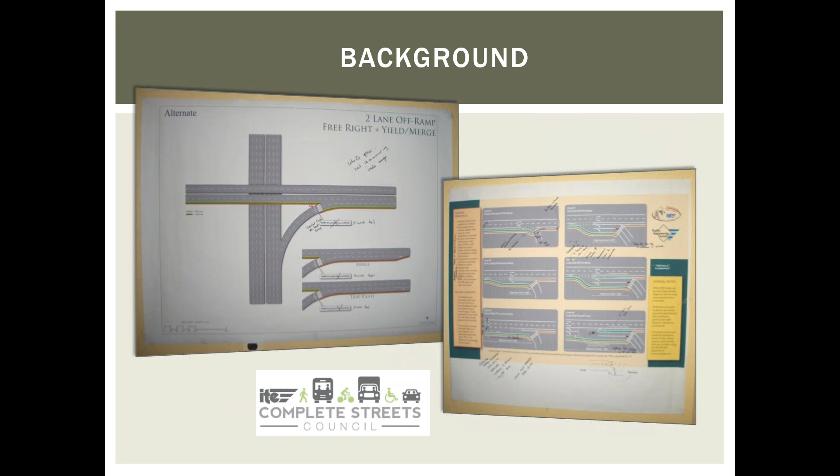So where does the freeway end? You're going to hear me talk about speed, perception, and expectation a lot, and freeways fall into that category quite a bit, because they're the opportunity to either continue the message of being on a freeway onto the local street, or tell someone on a local street they're already on the freeway by the way we design them, or to do the opposite: make a very clear statement that you've left the freeway and now you're in a community where people of all modes and all types of users should be present.

Motorists should be looking out for them. A lot of this has to do with slowing it down and making it very obvious in terms of the expectations for all modes, making it welcoming for people of all modes to be navigating through these locations.

This often is the critical component of a community in terms of being able to have real mobility, and have walking and biking be an alternative mode. And of course there are people for whom this is their primary mode, either by choice or necessity, and having freeways bisect areas where we have desire lines, land uses, and reasons people are going and want to walk and bike there is important.

However, of course, that has to be balanced with the mobility needs of vehicles at interchanges, and I think that's what makes these types of trade-offs and design decisions particularly challenging, because there's a lot of demand and need for freeways to work, for freeway interchanges to work for a lot of different users.

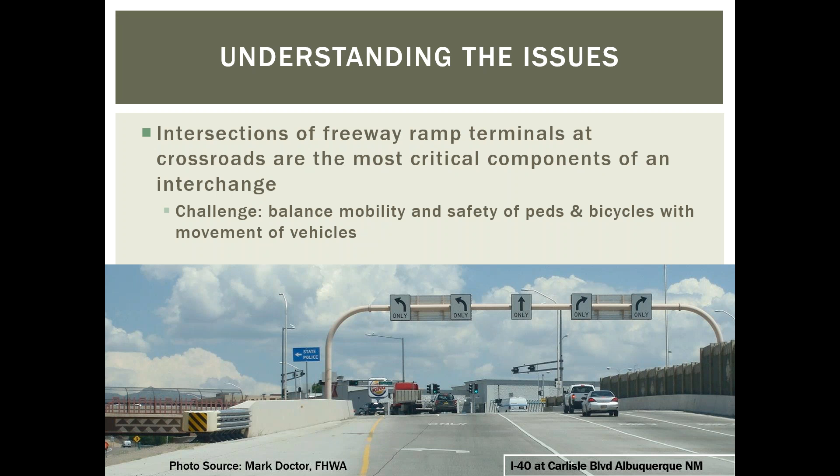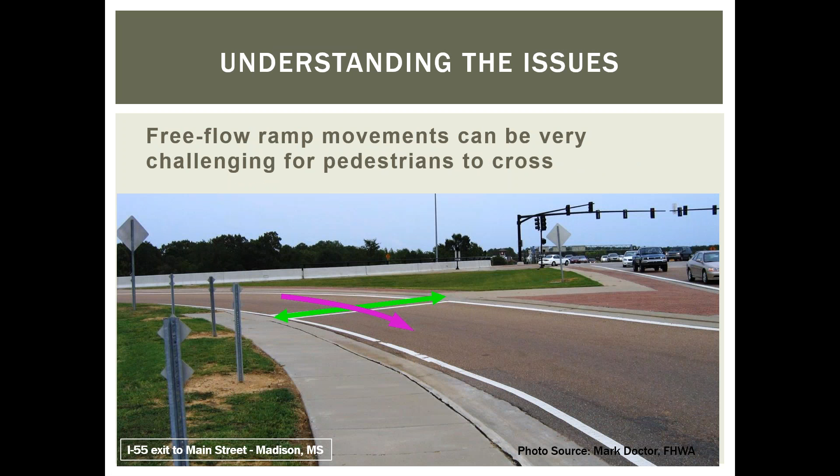In particular, when we talk about speeds, it's the geometry of the ramps that drives a lot of the speed. Anytime we have free flow conditions, which often we do in both the on and off ramp portions of an interchange, we have challenging, often uncontrolled interactions happening between vehicles and pedestrians, and vehicles and bicyclists, at high speeds.

So key issues involve expectations. If there are not very many pedestrians, and often there are not many bicyclists in these areas, either because they don't feel comfortable or there are not that many reasons land use-wise they need to be there, it keeps expectations even that much lower that you're going to be interacting with those types of users. Speeds really do create an opportunity for, when collisions happen, for much more intense injuries and fatalities to occur.

We have discontinuous facilities. I talk about one of the signs that we should put in the MUTCD is the good luck sign, because we could put that at a lot of our interchanges right now, right? You see that a bike path or a bike lane comes right up to the start of it, and then it just disappears and picks up on the other side. And we see that with sidewalks either not being present at all on structures or maybe only on one side.

Lighting is a major consideration, especially underneath an overcrossing where you have all kinds of difficult hidden areas where pedestrians might be waiting to cross the street. Unmarked crossings, again, kind of just this general expectation that there wouldn't be pedestrians and bicyclists at these locations, so why provide for them? And so there just are not facilities at all in many cases.

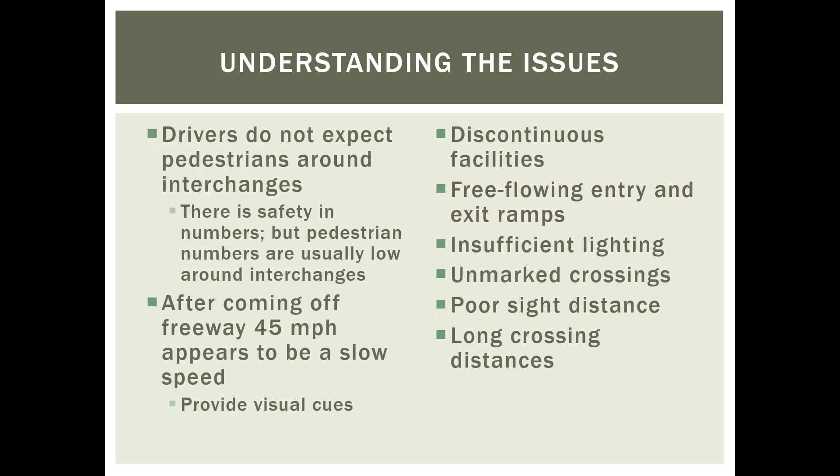Definitely poor sight distance, both just because of the angle that we're designing the ramps, as well as some of the obstructions that might be in place, and for sure long crossing distance, especially if we have really sweeping ramps that create a large radius, or if we have really large signalized intersections that have multiple lanes that people have to cross.

So there are some resources that are available out there. The most recent on this is the draft recommended practice that ITE has released. It's available in the bookstore, and I've finished all of the response to comments on the final round of edits, so I'm expecting that the final proposed recommended practice should be out pretty imminently.

That is the most recent, and it did refer back to some of the other state and local efforts to put together some documented design guidance on this topic. But there is nothing at the AASHTO level, at the Federal Highway level, in terms of 'this is what you shall do' to accommodate pedestrians and bicyclists.

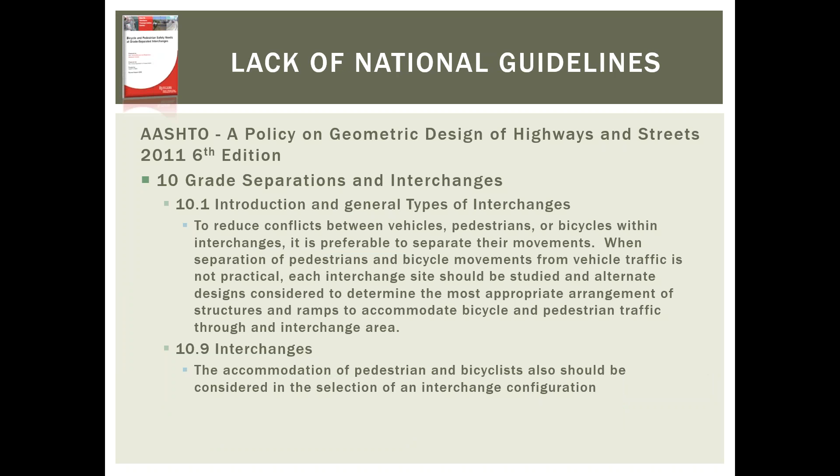So I'll be talking about some specific case studies and some specific configurations of on and off ramps in the next several slides, but I think it's really important to start with what we call the guiding principles in the ITE recommended practice. And I think that's really helpful because there are so many different types of interchanges that we were not able to go into all of the different iterations of in the recommended practice, that the application of these guiding principles to those, as well as to large intersections, can kind of help extrapolate from this document into other types of scenarios that you may find yourself in.

So first and foremost, providing those ped and bike facilities. I've been mentioning that in terms of if there's an expectation that why would someone want to be walking or biking here - maybe that's the only way they have to get somewhere, maybe it's because they are choosing to do that, and in many cases it's because we've actually provided land uses, we've provided bus stops that they need to be there, and this is their way to be able to have mobility.

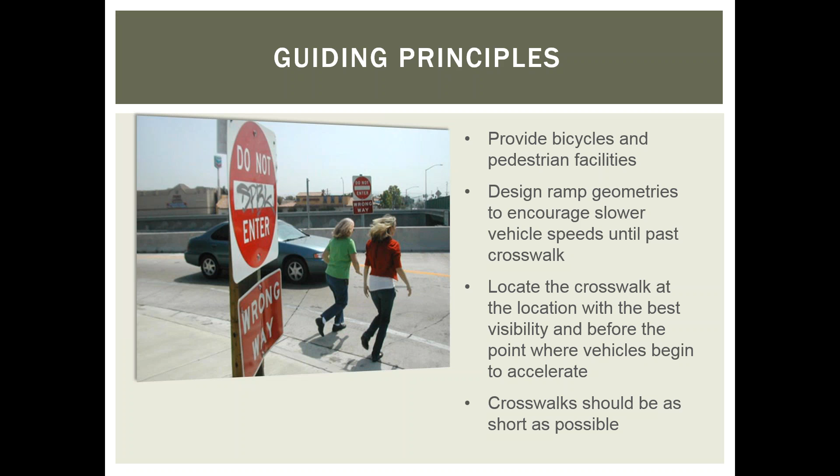So provide those facilities, slow things down. That's going to be the most common kind of recommendation you'll see in a lot of these iterations - how can we change the ramp geometries to have slower speeds occurring where those conflicts between pedestrians, bicyclists, and motorists occur. Locate the crosswalk at the split-the-difference location, and I'll show you examples of that - so not the most direct, not the shortest, but halfway in between where it's the most visible and the slowest speed.

Some specifics on bicyclists, and these will be more obvious when I show you some pictures and graphics. We often have very long dedicated on-ramp lanes on the arterial before you get onto the freeway.

When those on-ramp lanes, whether one or two dedicated lanes, are 200 feet or longer, we have a different recommendation for where you place the bicyclists. Rather than keeping them to the left, you keep them to the right and then move them to the left. There's what we call a merge zone put in place during that transition from right to left.

Also selecting crosswalk treatment is important. A lot of the crosswalks in an interchange configuration are uncontrolled, with no stop sign and no traffic signal. So using best practices from other contexts, for when we need to do more than just paint two white lines on the street, improves pedestrian safety and is applicable in an interchange context as well.

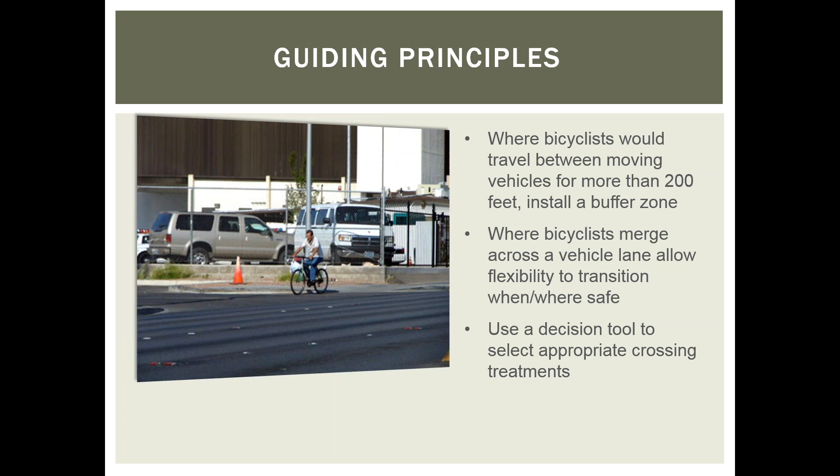So just do it. Don't fail to provide, but provide the right level of accommodation needed for the context you're in. A lot of this is cumulative, so for those who have taken Designing for Pedestrian Safety 101 and the other 201 modules, you'll see bits and pieces of crosswalk, sidewalk, and intersection design best practices that roll up into this interchange module.

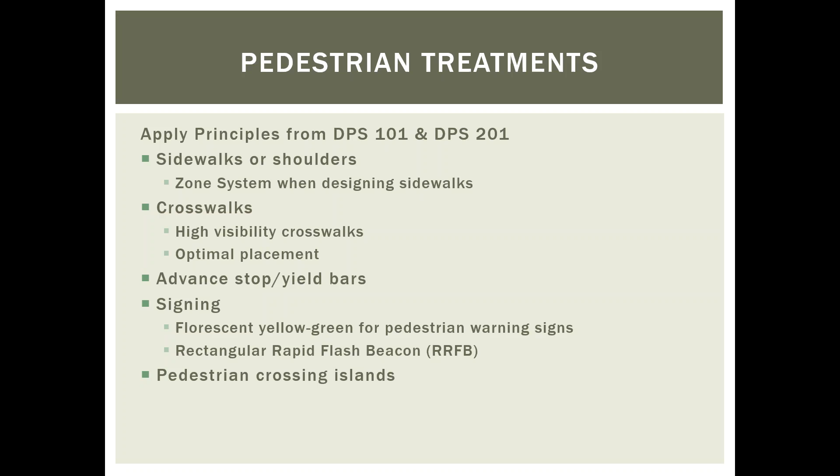Providing a buffer for pedestrians is one of the most important things we can do to improve comfort and reduce stress as they walk through a complex location such as an interchange. Providing a dedicated, buffered space along the arterial is a very important best practice, and it also helps with ADA provision of ramps at the intersections.

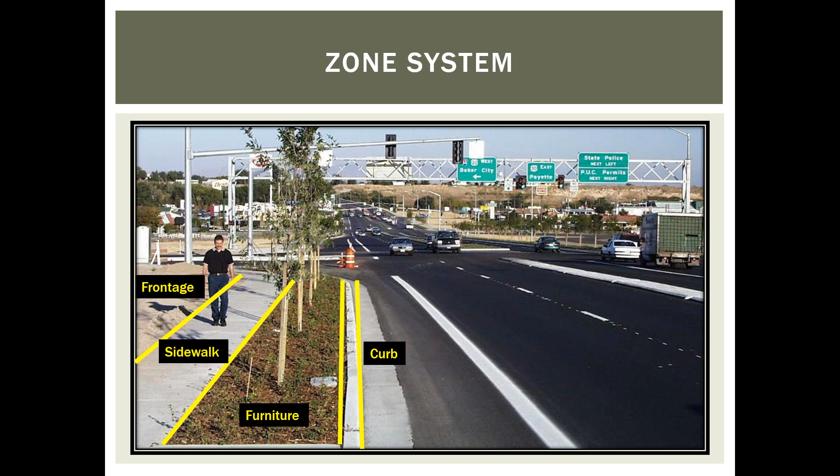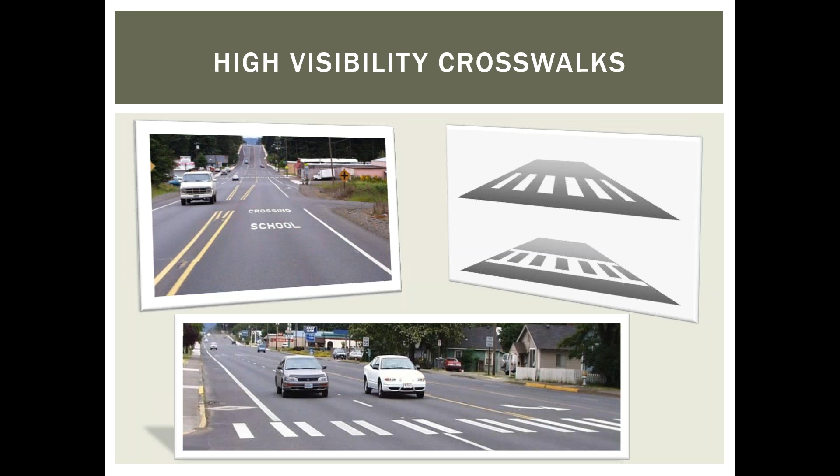Providing high visibility crosswalks as a baseline, particularly for uncontrolled crossings, makes pedestrian crossings very visible to motorists. Providing signing to make sure crosswalks are visible in advance is important, but not over-signing—over-signing is usually a sign that the design itself isn't working well at an interchange.

The benefit of raised islands and medians applies to interchanges too, breaking up the crossings, letting you pay attention to one direction at a time, and signaling that you're now in a local area rather than on the freeway—also an opportunity for placemaking and streetscape.

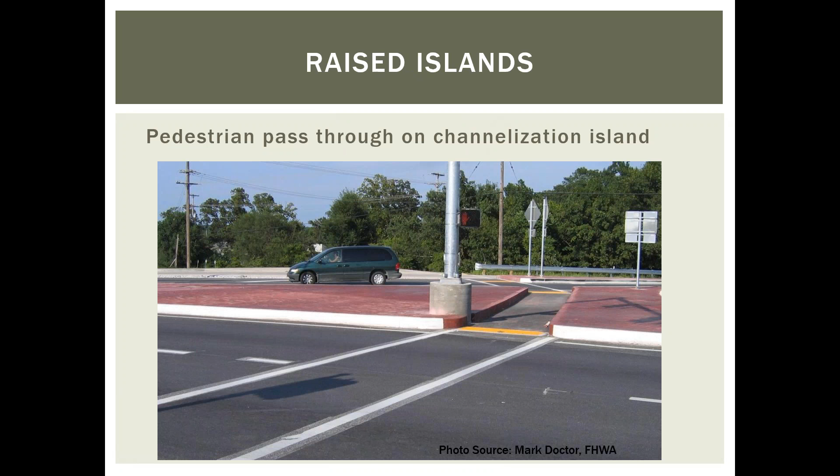Enhancing beyond just signing and striping for uncontrolled pedestrian crossings is really important at many on and off ramps with high speeds. Testing for rectangular rapid flashing beacons, pedestrian hybrid beacons, and pedestrian signals helps improve yield compliance for crosswalks—but again, not over-signing or cluttering it so it's difficult to navigate for all users.

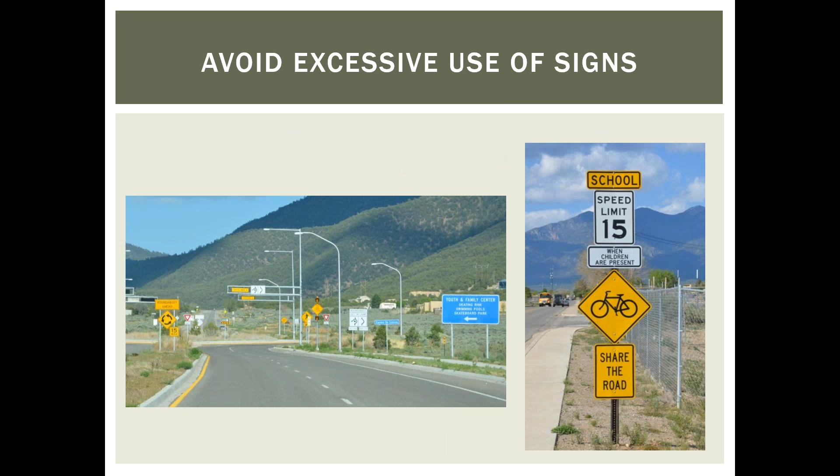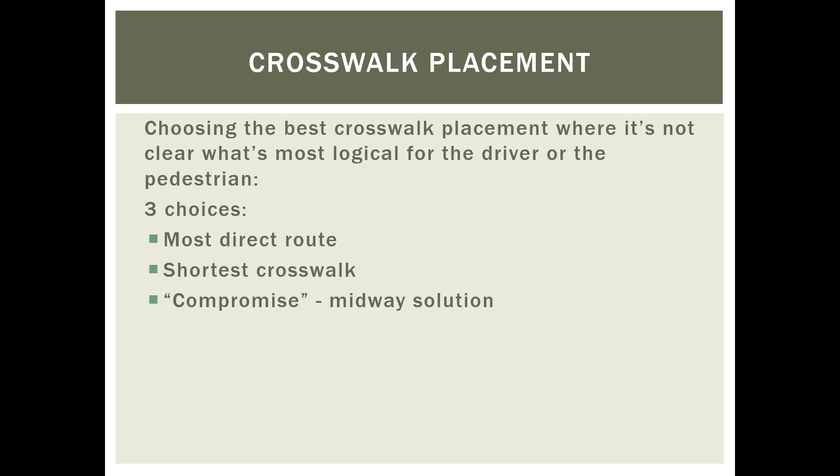Let's talk about crosswalk placement. I mentioned that splitting the difference is the approach we recommend. You have three choices when placing a crosswalk across a ramp. You can place it at the most direct route, extending the sidewalk directly to the other edge. The challenge is it's the longest distance, giving the most exposure time, and pedestrians are crossing with their back to traffic.

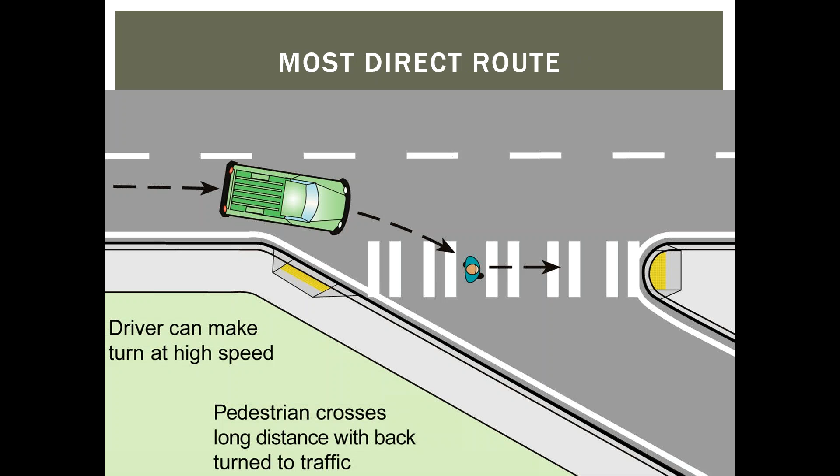You can place it where it's shortest distance-wise, but this crosswalk is much less visible to the turning vehicle heading to the freeway, and it's where the driver has already accelerated through the turn. So splitting the difference is the location that isn't too far out of the pedestrian's way, but is highly visible, and the motorist's acceleration hasn't yet begun.

I'm going to walk through a series of iterations that go from the least complex to the most complex on the on-ramp and off-ramp side. I'll touch on some of the more innovative interchange configurations out there, but mostly refer back to the guiding principles, since the ITE recommended practice includes the single point urban interchange, the SPUI, as a case study, but doesn't touch on the others specifically.

Starting with the most basic and least complex of the interchange configurations: this is an on-ramp where we have a shared right turn to get onto the freeway. I'll pull up some bubbles so we can see some of the key features, and you'll notice these accumulate.

We'll talk about the first set of these, and then as I add a different layer of complexity to the ramp configurations, we'll add new tools to the mix. You can see we've tried to square off this on-ramp as much as possible to make it as close to turning right as we can, while still accommodating the typical design vehicles—trucks in this situation.

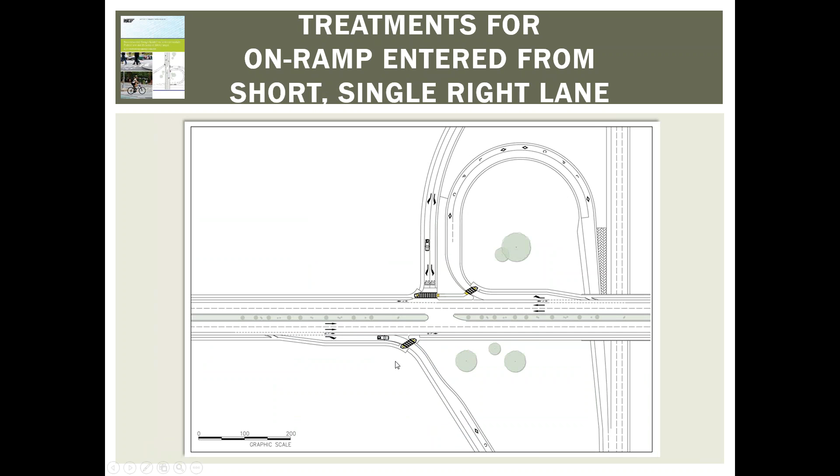So now we're at the next iteration, where we have a dedicated right turn lane, but it's less than 200 feet, so we're calling this a short right turn lane. This is a configuration you should be used to at a conventional intersection, where best practice is to keep the bike lane to the left of the right turn to avoid a right hook, so you don't have the right turning vehicle crossing across the bike lane.

But what's different in this configuration is we still have a single lane dedicated right turn lane into the freeway, but now it's longer than 200 feet.

The 200 feet was a guideline that we crowdsourced through all the different conferences and sessions we took this to over the years. That number came out of the mix of how long somebody's going to feel comfortable riding as a bicyclist with vehicle travel happening both to the left and to the right of them. So for about 200 feet, that's uncomfortable but manageable, but longer than that, it starts to get very stressful.

So the concept here is that because this is longer than 200 feet, you're keeping them to the right, and then when you get about 200 feet out, you're merging them across to be to the left before the on-ramp diverges from the arterial.

Again, this is an excellent location for using green striping. A typical way to do it would be to green stripe it here and then do full lane bars all the way through this conflict zone, and then green lanes when you move it to the left, so it becomes very clear where that weaving action is happening, where that conflict zone is.

The point here is that you're able to get across in an area rather than at a single point, so the bicyclist can really look for the most comfortable place to make their way across. That's trying to reflect what we heard from a lot of people about what they're doing in practice, in terms of where they feel most comfortable, rather than being told right here, right now you need to cross what could be a pretty busy stream of traffic.

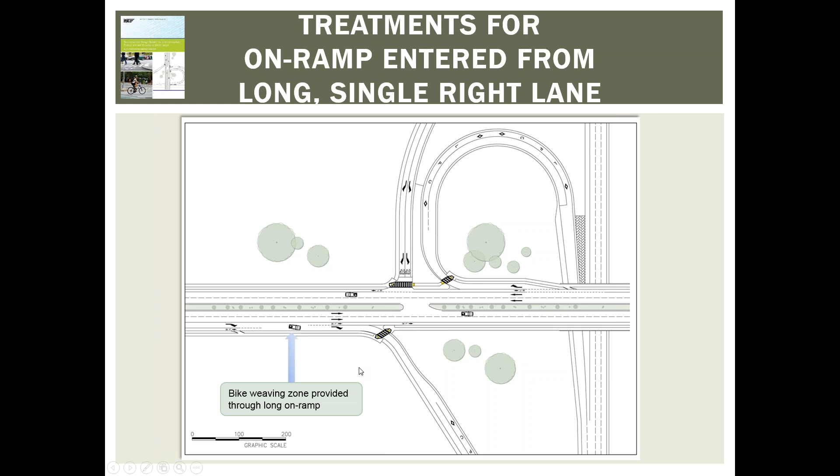This is the next level of complication. In all of these configurations, we still are providing the crosswalk, but I think many people may choose to take the crosswalk approach because you still have this weave zone happening, but now you're weaving across 2 lanes of traffic.

There's an argument about whether you should even provide this at all, but what we've tried to do is, in all cases, have an opportunity for people to stay on the street when they want to. Using green paint here to emphasize the conflict zone would also be helpful.

This is likely one of those cases where you would use some type of beacon, if not a pedestrian hybrid beacon, on the crosswalk. If that ends up being the implemented device for the crosswalk, that's certainly going to benefit the bicyclist, who can exit and use a trail and then cross using a pedestrian hybrid beacon.

What you see shown here uses California yield laws, in states where this is a stop for pedestrians this would, of course, be an advanced stop bar. But if this does remain an uncontrolled crossing, the very important additional treatment is putting these advanced yield limit lines to reduce the multiple threat that happens when you have the two lanes here.

You also see that we've tightened this up quite a bit, so that the turning speeds happening at this location should be quite a bit slower than they conventionally would be.

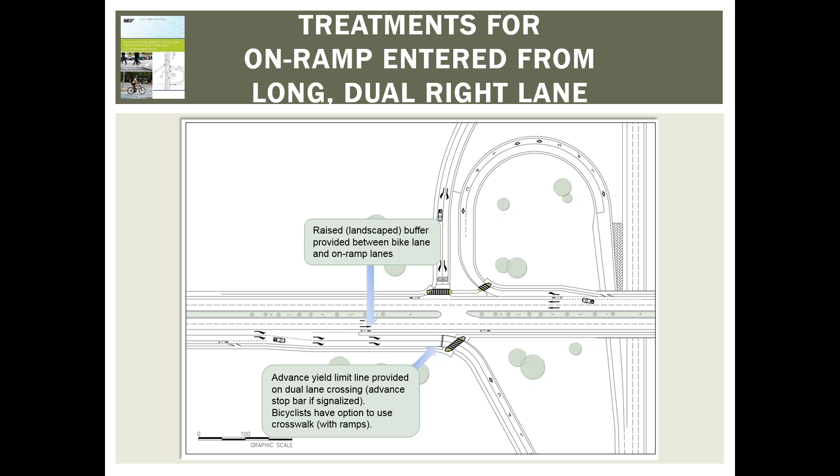I'm also recommending putting in a raised landscape buffer at this location. You now have a situation where a bicyclist is traveling with 2 lanes of travel on either side of him or her, so having a raised landscape buffer can help it feel like they're not only protected by paint.

Here's just a photo simulation example of how that 2-lane treatment could be enhanced. You see the advanced yield limit lines coming in here, as well as the installation of a rectangular rapid flashing beacon on the crosswalk.

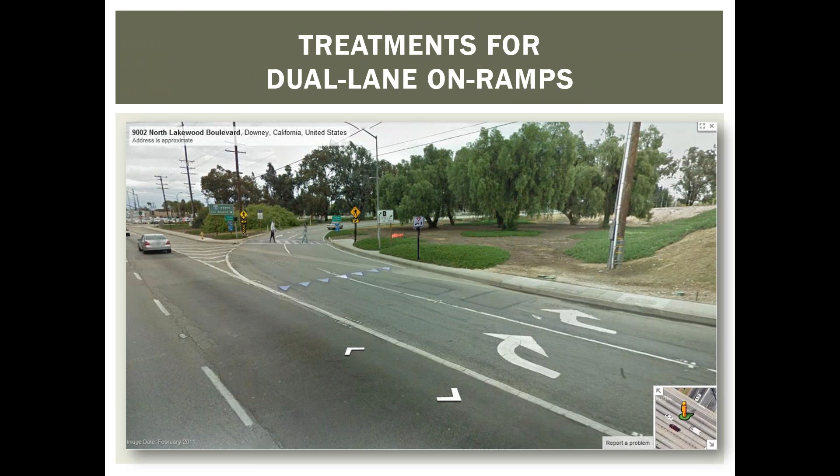So this is the example I was mentioning earlier in terms of providing that HOV queue jump option. What's happening here is you've got a dedicated on-ramp lane leaving the arterial, but then you have this second option lane for people in HOVs to have access. Here you don't even have the crosswalk striped, but often you see a scenario where you do have the crosswalk striped, and you're setting up a multiple threat that's avoidable by just starting the HOV downstream of that crosswalk. You're also creating a situation for bicyclists where they don't know where to position themselves because of that option lane, and the chances that a vehicle might suddenly cut them off as they're trying to travel through. So why you don't see that as one of the cases is because it's just not recommended.

In the ITE guidelines, the recommendation is to pick one. If you need two lanes, then do two lanes. Otherwise, just keep it at one and start that queue jump downstream.

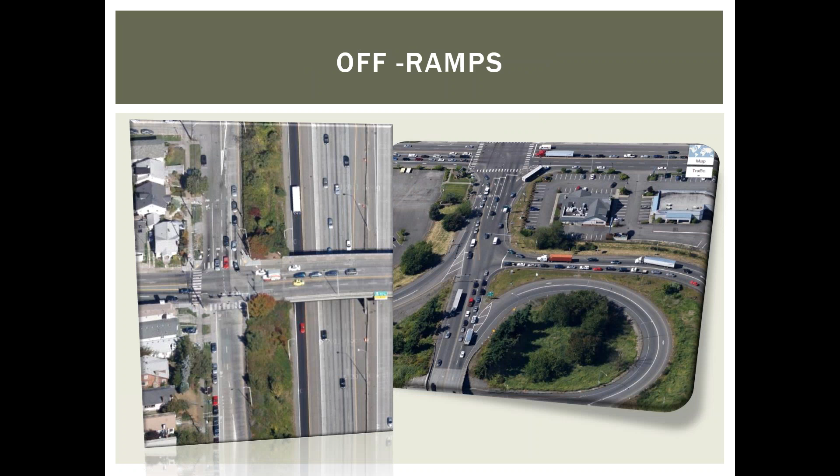Moving on to a similar progression on the off-ramp side, this is a scenario where we have no dedicated receiving lane on the arterial. It's split, so you have an eastbound and a westbound off-ramp scenario - one coming in here and the other being the loop coming in over here. The key feature is that it's stop controlled rather than yield controlled. You're coming in at the T, stopping, and then turning right, rather than what we see quite frequently, which is just a very sweeping right turn with yield control.

This is a similar scenario, except now instead of an eastbound and westbound split, we've got both ramps coming in for both directions. Again, stop controlled - you stop and then turn left, or stop and turn right, slowing things down and making it possible for the crosswalk to be very visible.

Now we have a scenario where there's a dedicated receiving lane on the arterial. We've tried to adjust the geometry so it's as slow of a right turn movement as possible, given that you still have that dedicated receiving lane. But what you'll see now is one of the controversial aspects of ITE, so I want to spend some time explaining the reasoning for why we have this configuration in the manual.

What's happening here is you have the bike lane on the arterial approaching the ramp with a yield control. The reason for the yield control is not because we think, from a right-of-way allocation standpoint, that the bike should have to yield to the vehicles - of course vehicles on the arterial don't have to yield to vehicles exiting the freeway. This is a scenario where it's physics: we've determined it's not possible for a vehicle exiting the freeway onto the arterial to have enough time to see a bicyclist traveling through and be able to slow to yield to them. So it's an assignment of right-of-way based on physics, not based on modal priority.

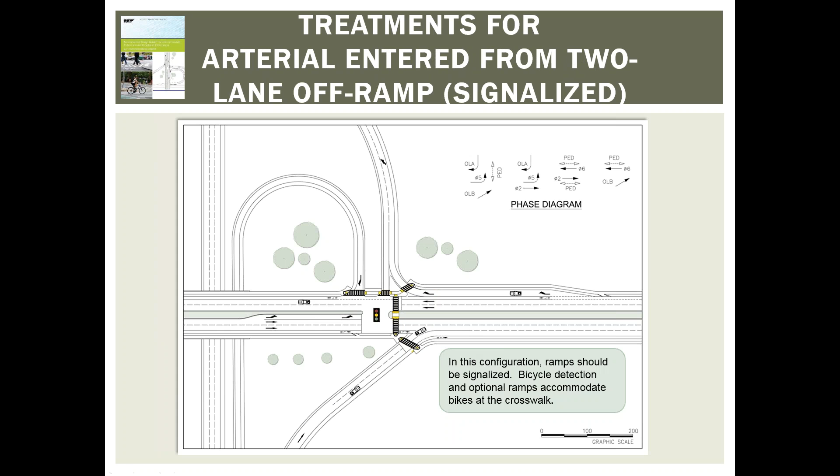Finally, we have the configuration with two exiting lanes and two dedicated receiving lanes. This is very similar to the one-lane, one-dedicated-receiving-lane scenario, except we now have a multiple threat on the crosswalk crossing those two lanes on the off-ramp. So again, at a minimum, putting in that advanced yield limit line to address the multiple threat is critical. This is also likely a scenario where a pedestrian hybrid beacon could be considered for the pedestrian and bicycle enhancement of that crosswalk.

So how do you choose if this is a rectangular rapid flashing beacon, a ped hybrid beacon or HAWK, or a full pedestrian signal? There are different tools out there. This is one I've helped develop called the Crosswalk Plus tool, and it goes through the different contextual considerations of all the devices that have been studied, referring back to the NCHRP 562 study from several years back on the efficacy of different devices given different contextual considerations.

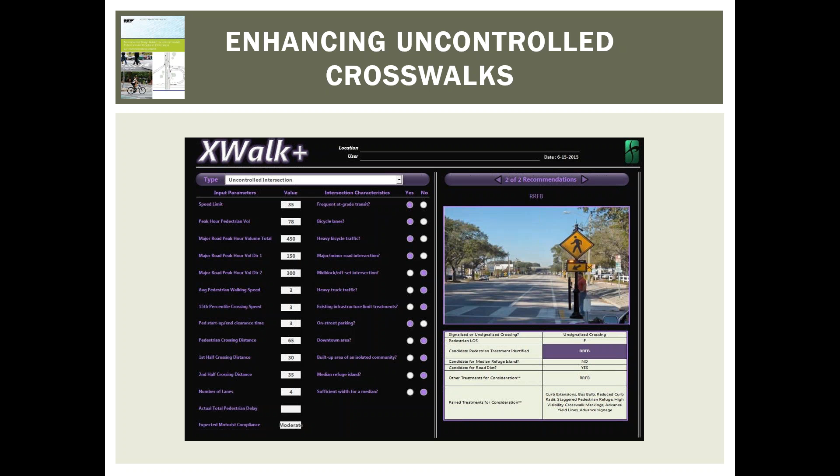So it is applicable at an interchange in terms of number of lanes, number of vehicles, number of pedestrians, speed, whether transit's present, those types of considerations. Typically this has a broad range of tools it'll recommend, but in an interchange configuration it's going to be, have you met a HAWK pedestrian hybrid beacon warrant or not? Have you met the pedestrian signal warrant or not? If not one of those, then probably the RRFB is going to be the only other device strong enough in terms of the type of yielding you need to get.

Interchange geometry is the most common thing you've heard me talk about today, in terms of slowing things down and making things more compact. It's a challenge for the speed in terms of the interaction at the conflict zone, but it's also a really uncomfortable scenario for the motorist, particularly a senior motorist or someone with other physical limitations, who has to look way back over his or her shoulder to see what's happening on the arterial and feel comfortable going ahead with the merge.

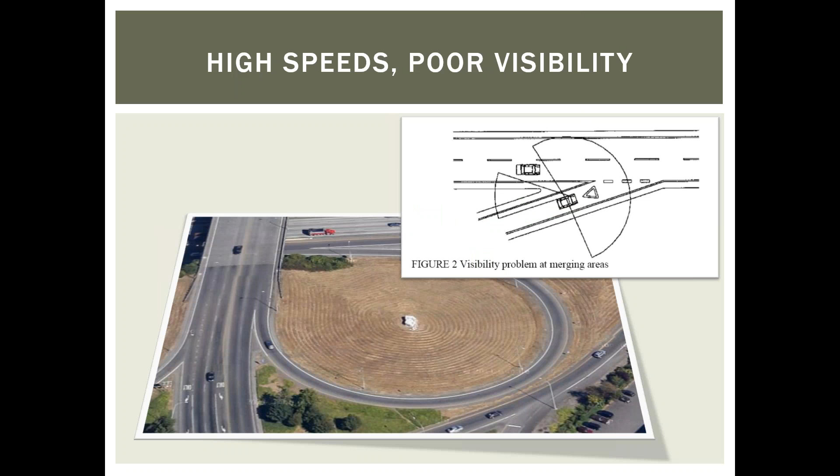When it is important or necessary to provide a dedicated right turn rather than just eliminating one, there is now new guidance on tightening up that angle so that the speed through which you're using that channel can be much slower than it would be otherwise.

So I mentioned we're not going to go through each different iteration of interchange configuration. There are reports out there on diverging diamonds and other alternative intersections and interchanges, and I'd encourage you to apply the guiding principles discussed earlier in this webinar to their design, particularly looking at geometries and speeds and provision of accommodations for pedestrians and bicyclists in all cases. The single point urban interchange is particularly challenging to cross the arterial in, because the efficiency of the signal, which allows one signal to operate the entire interchange, doesn't allow for any space in the signal phasing for a pedestrian crossing of the arterial.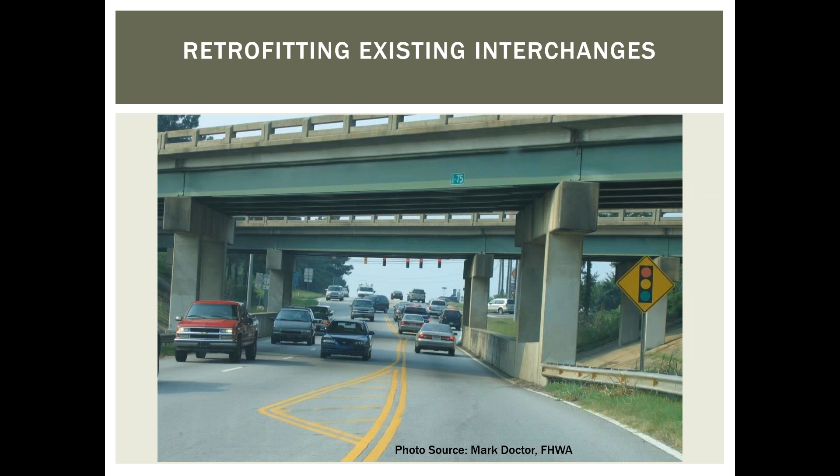In terms of retrofitting existing interchanges, most of the techniques I've been talking about are obviously applicable to new designs, but can be applied to retrofitting. The geometric changes in some cases are going to be very costly and very difficult, but in other cases it's not. It will really depend on topography in terms of how difficult it will be to square things up.

This is an example in Colorado of a retrofitted intersection or interchange that did provide a wide enough path through the intersection that now pedestrians and bicyclists, who previously had not been able to navigate through this, are able to pass through.

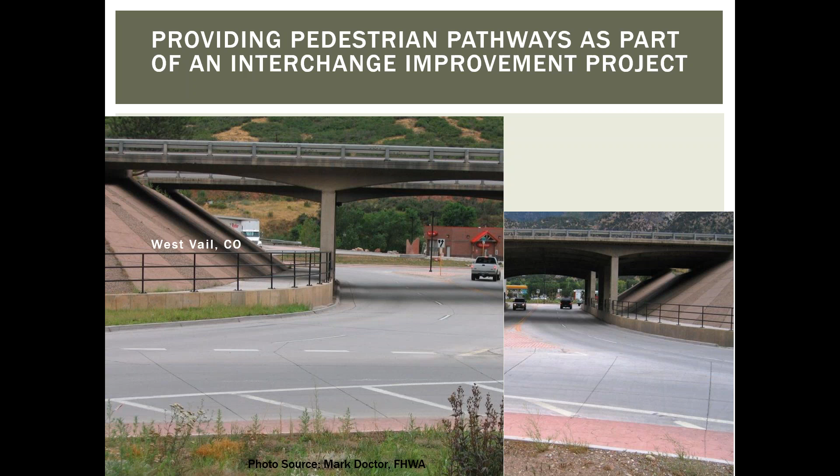And then that's it, so I would appreciate answering any questions that you have. Dan sent me some questions that many of you had in advance, and I do have some other slides at the end, so if you have questions I already have slides on, I'll skip ahead to those and refer to them in my responses.

Oh, great, thank you so much, Megan. We did get a lot of good questions, and feel free, folks, to keep rolling those in. I would like to keep it on your slides, if you don't mind, Megan, because I think we may be able to refer back to a few things that you showed. First, just some clarifying questions, I guess.

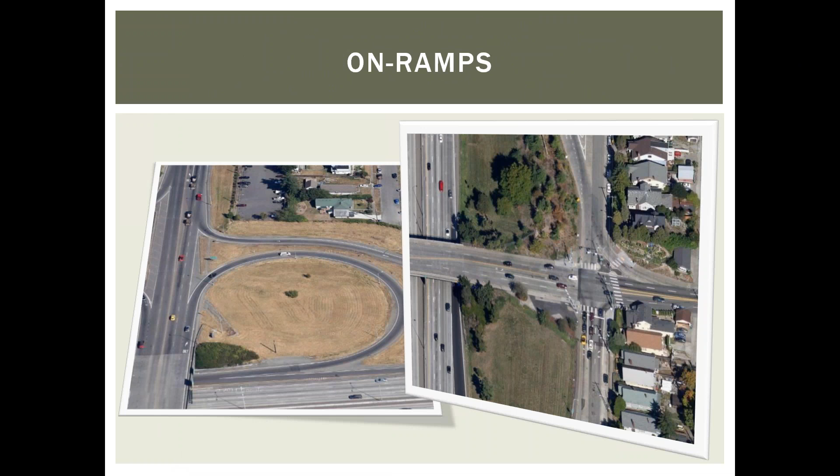There were a few questions about the recommended placement for crosswalks at entrance ramps, where you talked about splitting the difference between a perfect alignment with the sidewalk and a perfect perpendicular, shortest-path sidewalk. Some questions about the truncated domes and ramp placement — it looked in some diagrams like the ramps were angled out into the street rather than lining up perfectly with the crosswalk. Is this just something going on with the image, and in reality would you want the ramps perpendicular and facing directly at the crosswalk?

Yes, absolutely. These images are good for showing the split-the-difference concept, but they're not good for showing the orientation of the ramps, and that definitely should be changed so that it's completely aligned with the direction of travel.

Great, that makes sense — I think there was just some confusion about that. Fair enough. I think once you're actually doing the designs and getting that on the ground, you'd certainly want to follow the principles of making sure those domes are placing people in the correct position, in alignment with crosswalks.

Yes, and we did pay very careful attention to that in the ITE diagrams — this one isn't from that set — to make sure the orientation of the ramps in each case was done the way it should be.

Just a general question you could maybe comment on, Megan. It seems like we're talking about interchanges specifically with freeway designs, but these long sweeping turns seem omnipresent even in locations that aren't connecting one arterial to another, or aren't even freeway design. From your perspective, are we working against a relic of a time when freeway design took over our normal streets and roads? Well, and also the suburban land use patterns that require so many arterials.

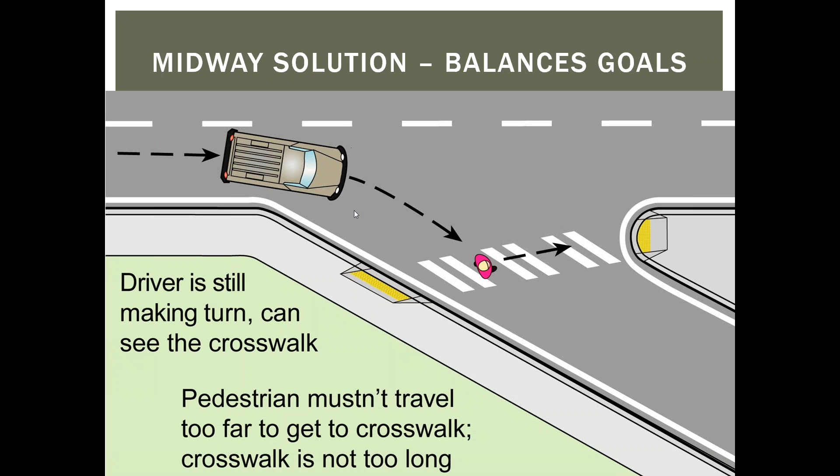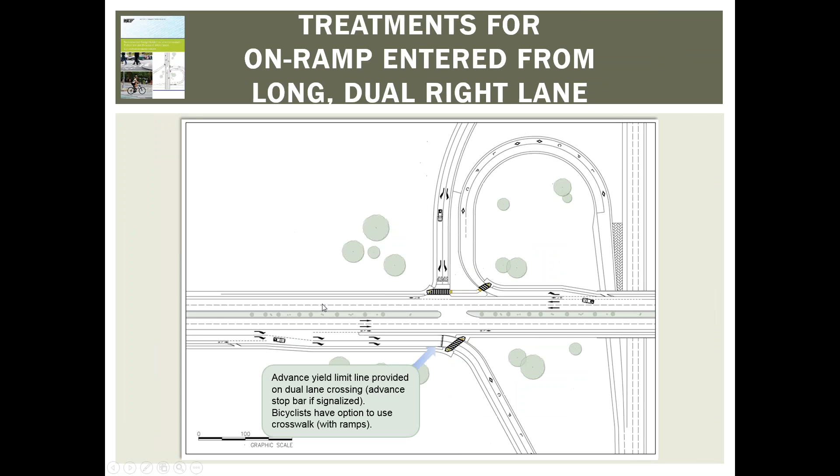I'm curious about when bicyclists are coming across where off-ramps bring vehicles onto the road, and the bicycle has to yield to the oncoming off-ramp traffic. Can you explain a bit more about that? It may seem counterintuitive, since a bicyclist traveling straight should pretty much be able to go straight as they normally would. Right, and so in this scenario, we're not showing that, right?

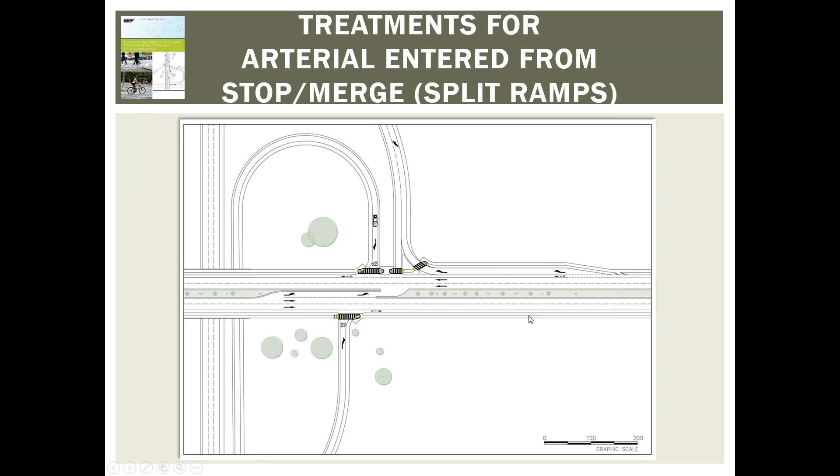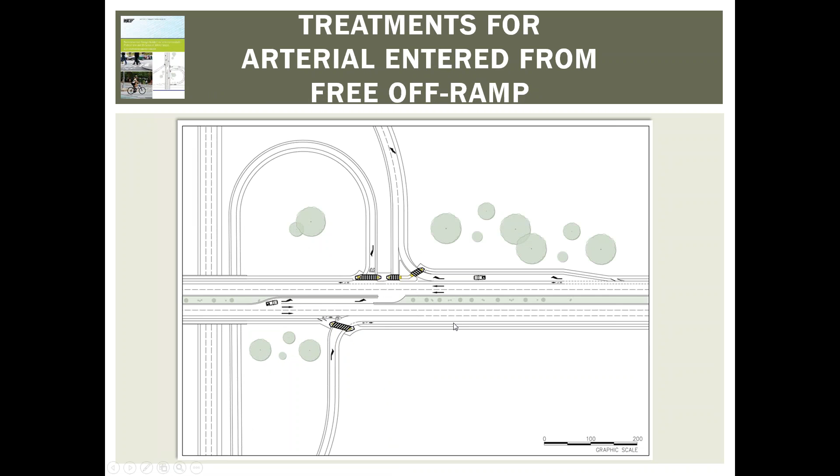So it's this scenario here where the bicyclist is traveling, but now basically a new lane on the arterial is introduced to become a receiving lane for the off-ramp. I have a zoom in of that here.

So what happens if you were just to say that the bicyclist should maintain right-of-way and be able to continue straight across without yield control on the bike lane? The concern is that even though you've squared this up as much as possible and slowed things down as much as possible, would a motorist exiting the freeway have enough time to see a through-moving bicyclist coming along the arterial and be able to yield to them?

So it's not do we want them to yield to them, or do we think they should yield to them. It's are they physically able to yield to them? The difference with bikes and pedestrians is the speed at which the bike is traveling, so it's just reaction time. Are you going to see them in enough time to be able to stop and yield? That was the concern and the reason for the configuration.

My preference here is that this is a case, especially if we have quite a few bikes and pedestrians, that we put something on the crosswalk such that it forces the yield, which a pedestrian hybrid beacon would force the stop. Then the bicyclist is able to trigger that in advance and retain the right-of-way. So it's physics rather than a preference. If you have follow-ups on that, or if that's confusing, I'd be happy to continue describing it.

I think that makes sense, and you may be using this in a situation where, if you have a high crash occurrence for bicyclists at a location like this, it might be an option to look at if you're concerned about that movement, maybe going back and taking a look at a design. So, yeah, that makes sense.

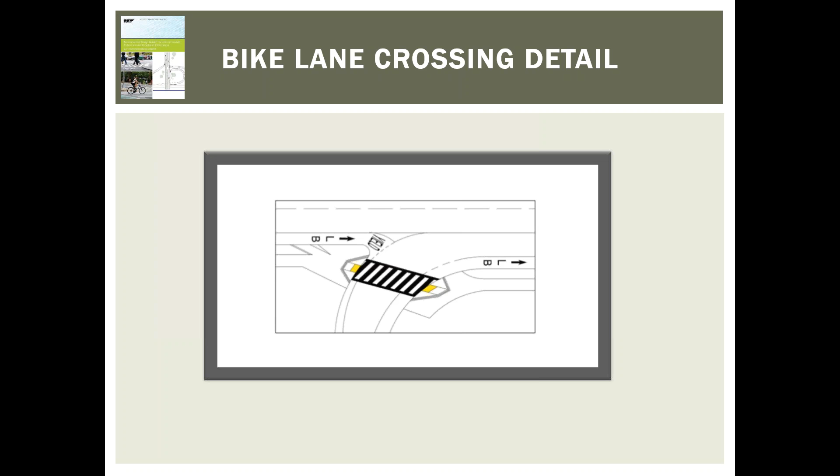One other question here - a lot of questions actually, Megan, about the DDI design. I think you did put some slides together with that. I wonder if it might be more appropriate to go ahead and cover some of that material.

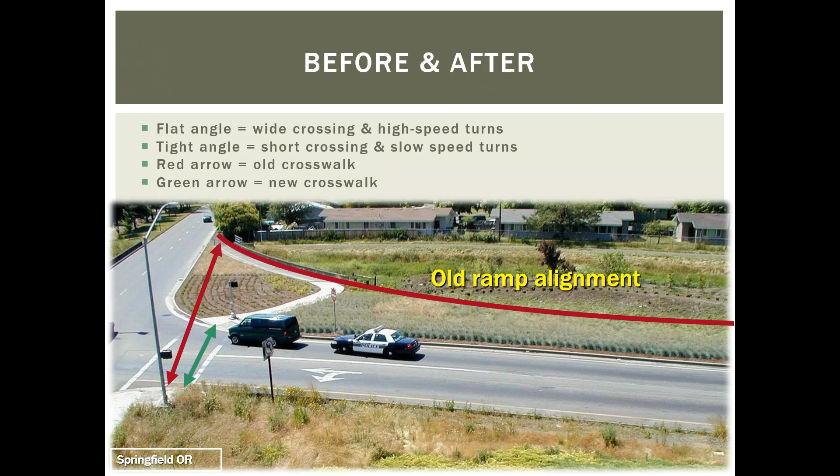Sure, I can go ahead and skip to that. The ITE guidance does not cover that, mostly because 8 years ago it was the SPUI that we were talking about a lot, and I think it was as we got towards publication that it was more about the DDI. So let's see if I can flip over to these.

So of course the challenge with the diverging diamond design is where do you put the pedestrians, because you're crossing the lanes of travel over to be contraflow, and you need to figure out how the pedestrians going through and across the arterial are going to be accommodated. So here's some pictures of the options here.

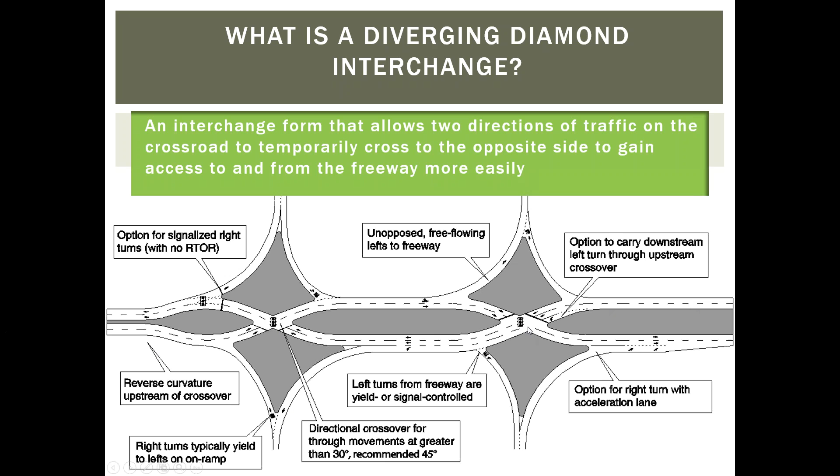If anybody hasn't seen it - basically you're approaching, in our conventional right side of the street, you get into these two signals on either end and you cross over. What this enables is having free-flowing left movements in either direction, so it's a lot more efficient for vehicle operations. Similar to the SPUI, it's been a big efficiency improvement for vehicles at these interchanges. So the challenge is how do you get pedestrians and bicycles to also be enhanced in terms of their movement through it.

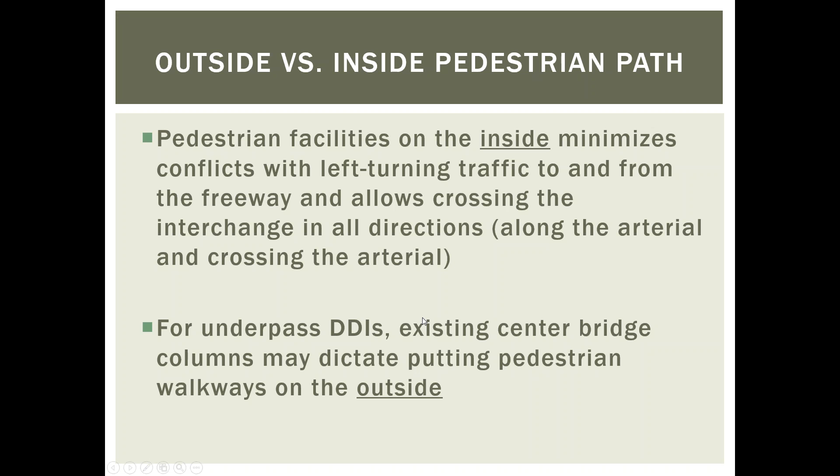A typical way that's being facilitated is to bring the pedestrians through the middle, and I'll show you a picture. So it's either putting these kind of outside walkways - what you see here is the dots are the different crossing points of all the ramps - or you bring them through at the signals into this kind of center walkway, and they would be crossing at these different points.

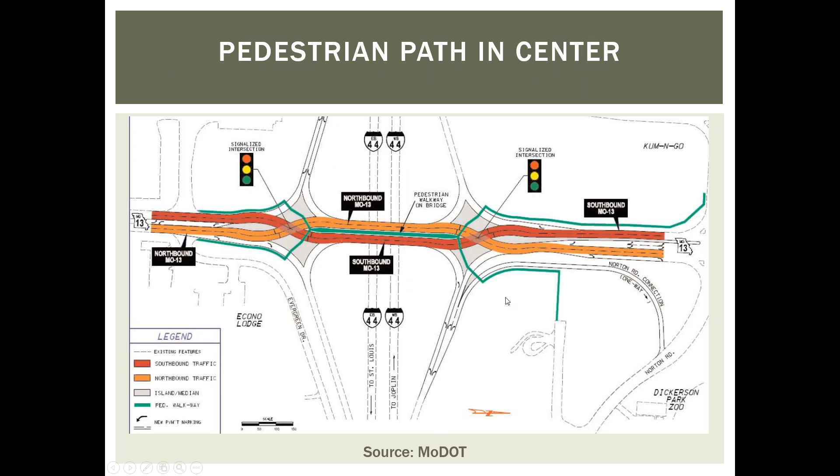This is an example of one in Missouri where they brought the pedestrians into the middle. I think conventionally this was treated as a Class One facility, the bicyclists on a path would also be brought through here. I don't think any of these examples show bike lanes going through here. So this is what the pedestrian facility looks like in the middle of the DDI.

Benefits are that you have a physical barrier separating you, and the crossings to get here are signalized. Of course, the constraints are it's not a particularly aesthetically attractive place to be, and you also may have some personal safety concerns with being a pedestrian stuck in the middle of this walled off corridor.

Walking through quite a long area. That said, in the Missouri case, they did have positive feedback from the pedestrians who used it. And it does save bridge width because you're providing just one centralized location for the pedestrians to be, as opposed to having to provide paths on either side.

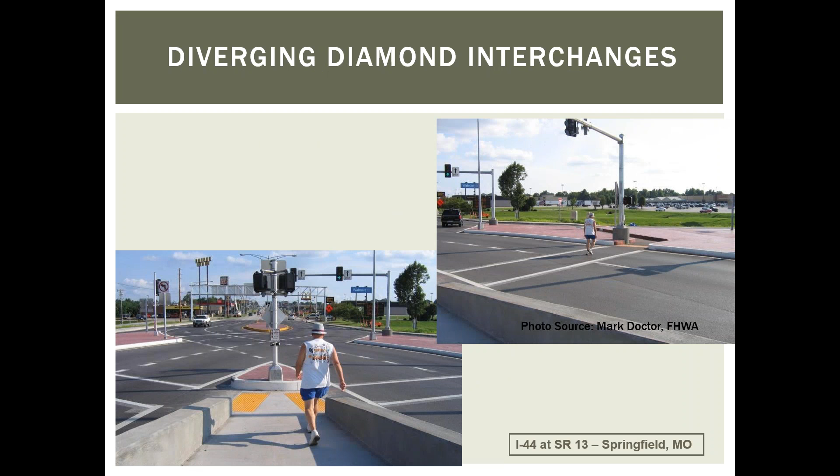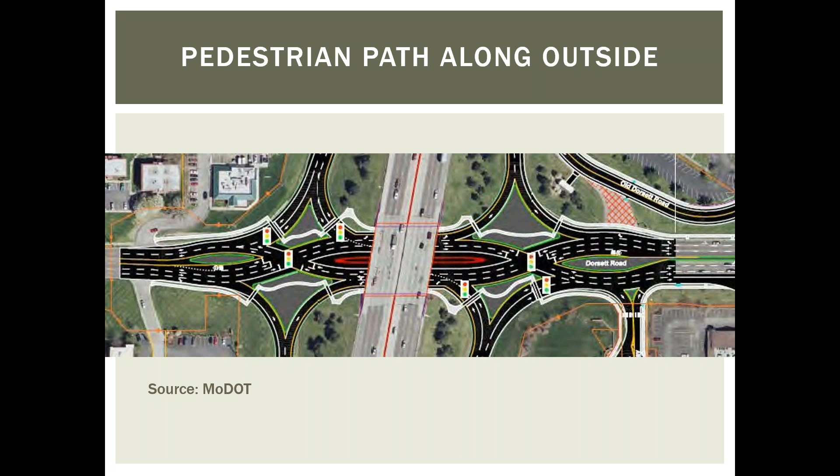Many crossings, the benefit when they're signalized is that they're controlled, but of course there's a delay component to the signalized crossings too, and that delay could be pretty great if the cycle length is pretty long. So I think the difference in which one you would choose really depends on your available right-of-way within the interchange, as well as where the desire lines are for pedestrians - if you put them in the middle, does it severely restrict their ability to get to the destinations that are nearby.

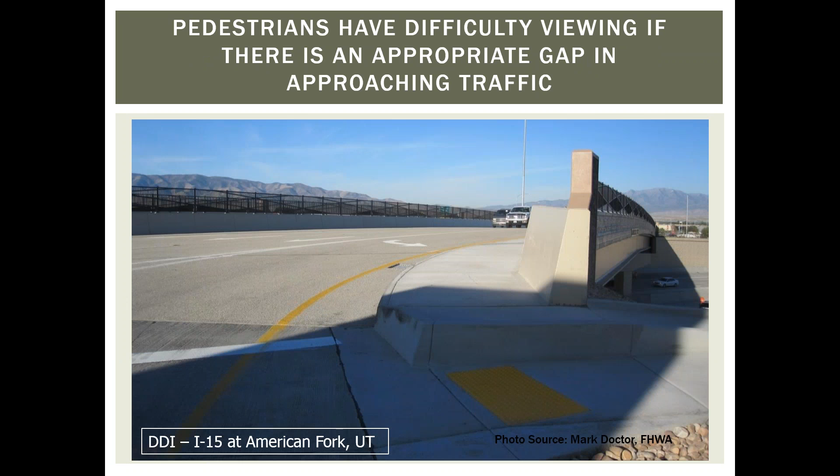Let's see if there's some more pictures here. This is the pedestrian's view. So definitely some sight distance concerns here because of the structure. And pedestrian signals have been used in some of those cases to improve the sight distance concerns. So that's what I have on slides there.

I'd be happy to answer any specific questions. I have not myself been involved in a DDI design, so if there's others on the call that have specific expertise in that, I'd be happy to refer you to somebody if you have any really detailed questions on a DDI.

Yeah, well, I would just encourage - I think we've got definitely some strong feelings on the DDI from some folks on the line. It certainly doesn't seem like the most comfortable place in the world to walk based on some images. I think there's a range out there of look and feel for a DDI. I've seen a few that I like more than others, so I'd be encouraged if you all have a DDI that you're especially proud of in your community, let us know about that one. It would be great to be able to point some people to some nice examples.

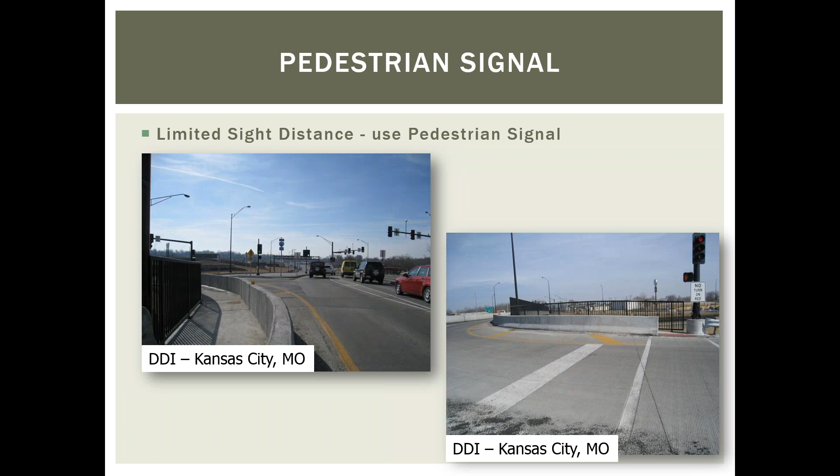The one thing that struck me in one of the initial images was that long, continuous concrete corridor or trough, I suppose, that without some shading or something, depending on location, it might be a fairly uncomfortable place to walk. But as you pointed out, Megan, it's really a trade-off. One of the trade-offs is that versus the multiple conflict points by putting it on the outside of where all the interchange, the exit ramps and entrance ramps, are. So things to consider.

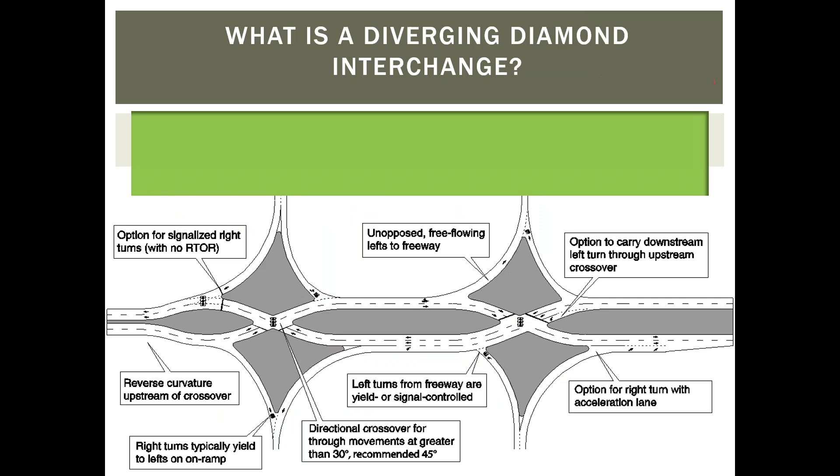Megan, we got some comments or questions about the SPUI, and we even got a question about the peanut. Somebody knows what that is. That would be great, I think that would answer some of those questions. Okay, let's see. I'm a little better on the SPUI than I am on the peanut, so I'll start with that first, and then I'll try my best on the peanut.

All right, so single point urban interchange. The reason I didn't put it in the base slides is because the more and more I talk about it, the more and more people say we're not doing those anymore. So it does seem to be potentially on the downside as maybe the DDI and others are coming up. But certainly they are in place. This one's actually about one interchange from where I'm sitting right now in Walnut Creek in Concord. So the challenge, see a picture of it.

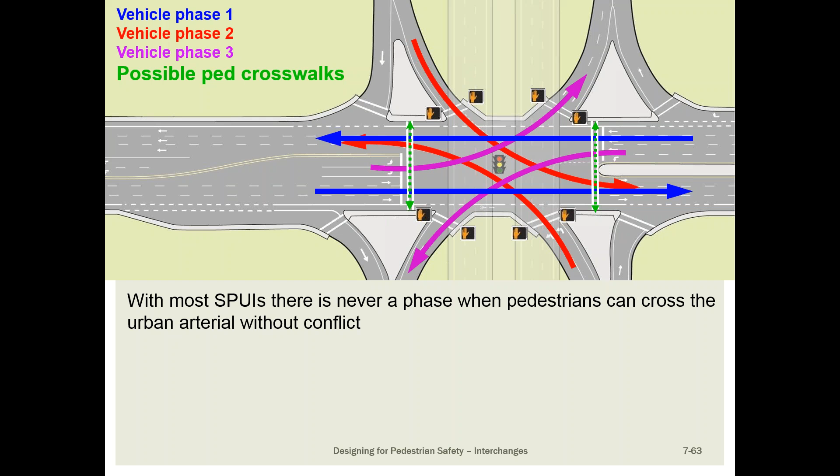All right, okay, so it's really efficient in that one signal controls every signalized movement of the interchange. The challenge is every vehicle phase is going to at some point conflict with an ability for a pedestrian to cross. So there is no opportunity to basically fit a full crossing of the arterial in without having some direction of vehicle phase conflict with it. So there's basically two options, and the selection of the option is really driven by what the pedestrian desire line is, where the pedestrian is going, and whether or not that's very close into the interchange itself or whether it could be efficiently accessed by approaching it outside of the interchange.

So if there is a need to cross within the interchange itself, then there needs to be a raised median so that you can do a two-stage crossing. And that two-stage crossing needs to be staggered, just like any two-stage crossing needs to be, because you need to not see the second phase of it as you're crossing, to not be confused that you can continue all the way through. So it's going to cross you to the center, then you need to walk down the median in the direction of oncoming traffic to a second crosswalk that would then cross with a separate phase.

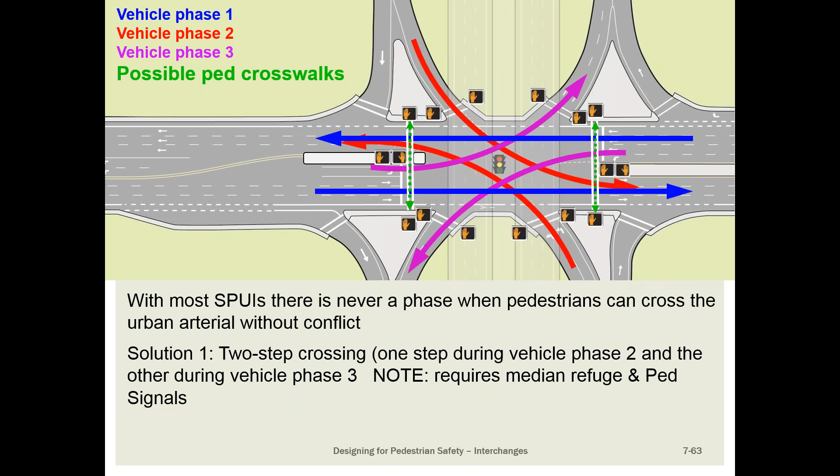So that's the SPUI. Any questions on that, Dan?

Oh, sorry Megan, I was on mute. Did we say what the SPUI stood for? It's a single point urban interchange. Great, and the DDI again is? The diverging diamond interchange. Great, thank you. That's perfect. Thank you.

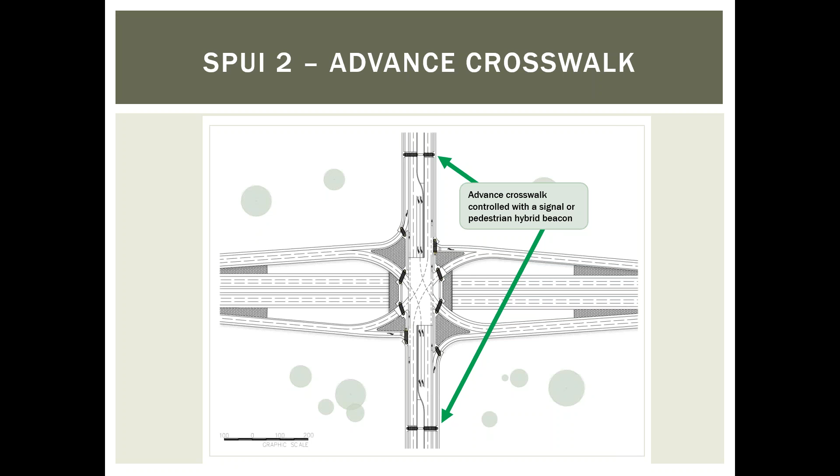And then, okay, so the peanut. The peanut is basically a pair of two roundabouts that enable you to cycle through an interchange with, rather than having signalized intersections with free movements as part of them or not, you now have a roundabout on either side. They have these in Truckee, not too far from the San Francisco Bay Area here. They're proposing another one on Gilman here in Berkeley, and I've seen several others that have been in the proposal, but I don't know that they're that common yet.

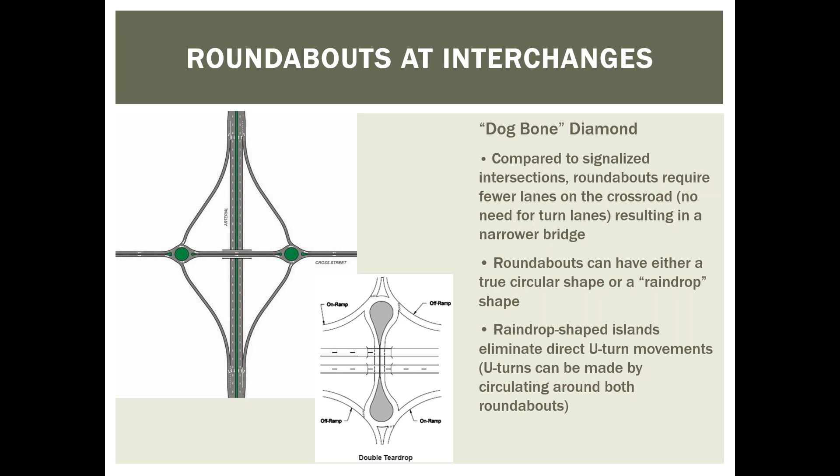We might have some pictures of Carmel, Indiana, which is kind of the roundabout city. It's really efficient in terms of all the benefits you get for roundabouts, also the safety benefits, because you don't have the left turn conflicts anymore.

I think the challenging considerations are going to be the same as for bikes and peds as relate to roundabouts, largely coming into play with respect to multi-lanes. For pedestrians, it's crossing multi-lanes. You see here an uncontrolled crossing of a two-lane, so there's a chance for a multiple threat. Putting some type of enhancement there, or looking for opportunities to make these single lane if we can, reduces the multiple threat.

For bicyclists, when these are designed so people are going 15, 20 miles an hour through them, it should be relatively comfortable for a bicyclist to just take the lane and ride with traffic. But having bike ramps available for the bicyclist to use a path through the side is important. I don't know if we can see it in the picture, but that should be an option here for the bicyclist to have both an on-street and an off-street path.

There are considerations for sight-limited pedestrians, who really use the direction of parallel traffic to navigate through an intersection. For audible navigation, roundabouts don't play well to that, because vehicles are approaching from many different angles. There have been some recommendations to use pedestrian hybrid beacons on crosswalks, to be able to use the navigation aspects of a crossing signal for pedestrians to mitigate that concern.

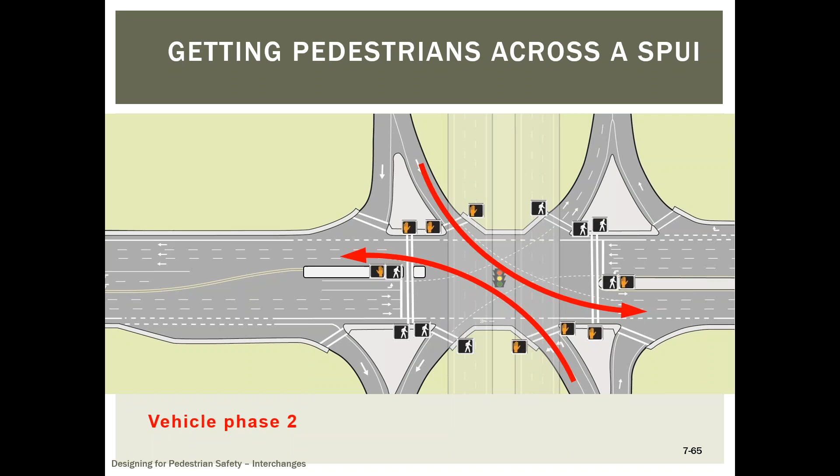We had another webinar on medians and crossing islands, but there was a question about the width. When you showed the two-stage crossings on the SPUI — I think it was this one, yeah, this is it — what width are you going for on something like that?

At least 6 feet. You need it to be wide enough to have a bike fit, right? So that's the minimum, and that's obviously challenging to fit if you don't have one there currently. That said, I bet most of these have a 12 to 14 foot lane width, so maybe it's not that challenging, because you can drop those lane widths down quite a bit to squeeze one in. But 6 feet is the minimum recommended because that's the length of a bike, and you can expect someone will need to fit a bike in there.

Getting back to one of our earlier conversations about speeds on and off ramps — are you aware of anyone trying lane narrowing, lane dieting, at interchanges to get those speeds down, particularly on the on and off ramps? I think oftentimes you'll see those ramps being fairly wide, and I'm wondering if that's just a standard design, or if there's flexibility to narrow those lanes down to get to the speed you want vehicles to be using.

I don't know that I've seen that specifically in an interchange context, but certainly we see it at intersections. We actually have that in my neighborhood, where they've put in striping around a lot of the corners to make you turn a little bit tighter. They've striped in shoulders throughout the neighborhood, and it certainly does slow it down. It's almost like elephant tracks on a turn — this is where your car should be tracking as you're turning.

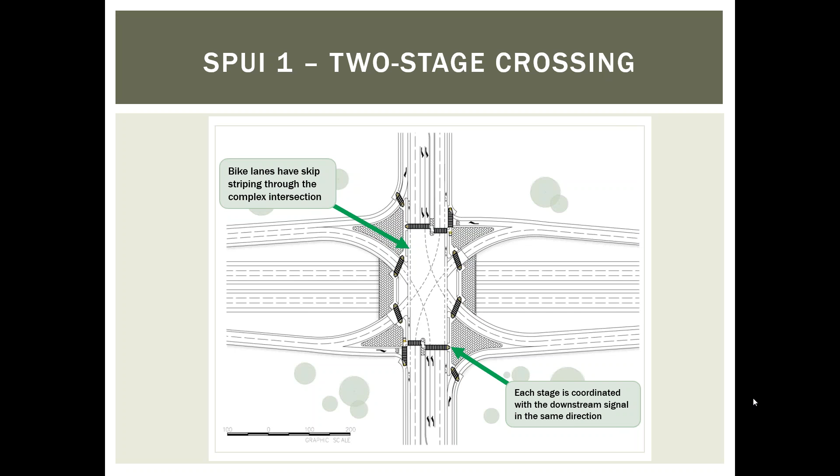A question came in about an agency getting a lot of pushback on the narrower entrance ramp or ramp throat design, due to a lot of truck traffic volume. As I'm sure almost all interchange locations are going to have a decent amount of truck traffic, any examples or recommendations for identifying those trade-offs, and I guess you could throw emergency vehicles into the mix as well?

You can probably tell these are not particularly exciting graphic quality drawings because we did them in CAD. We got early feedback when we'd done it more in Illustrator with cartoon style drawings, that it's not feasible, we actually have to get trucks through here. So everything we've done has been done to scale using turning templates of tractor trailers. That was a primary consideration, and all these samples were done by taking a currently built template and retrofitting it, so they're real world examples that have just been enhanced. There's an absolute recognition that interchanges have to accommodate trucks.

Any examples, Megan, in your guidance? I guess this is just one example of many that you have. Were there any examples that specifically called out cross sections where multi-use paths were coming through an interchange, and does that change anything about these designs, or is it really just widening things out, adding more space, and placing more emphasis on the crosswalk?